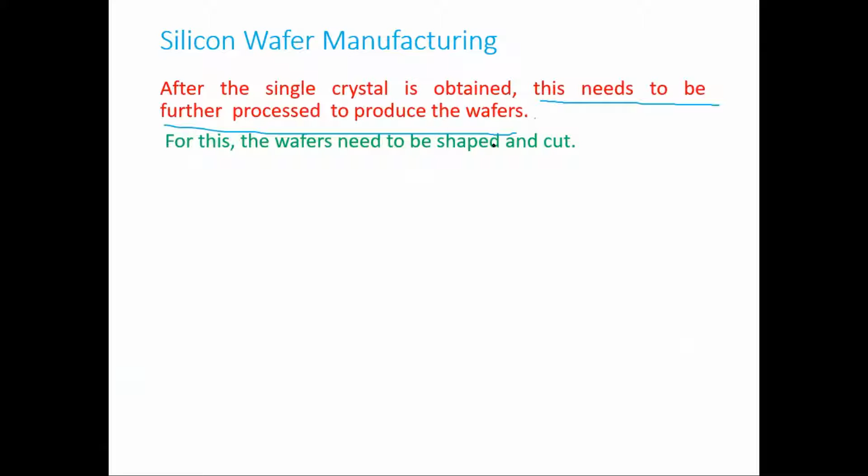We cannot do this with normal cutting materials; industrial grade diamond tipped saws are used for this process. Then the shaping operation consists of two steps.

The seed and the tang, at the end of the ingots, are removed. The seed is the one dipped in the molten silicon and pulled off. When you are pulling the ingot, you will find a tip there, a tang or beak, and that needs to be removed.

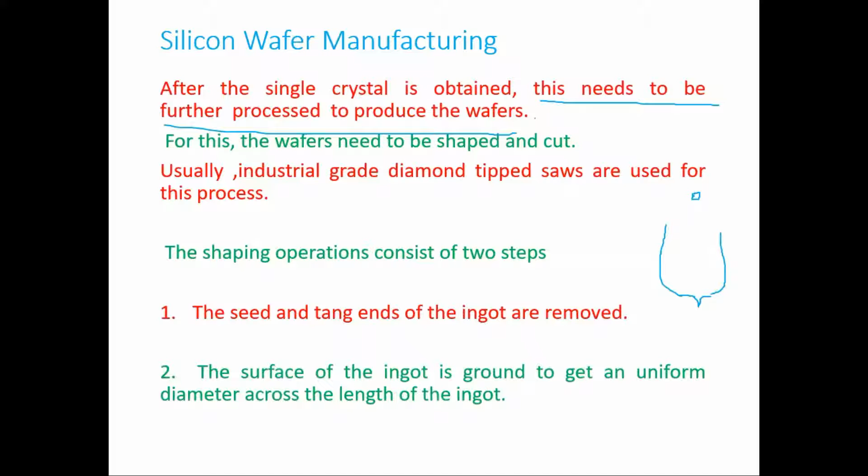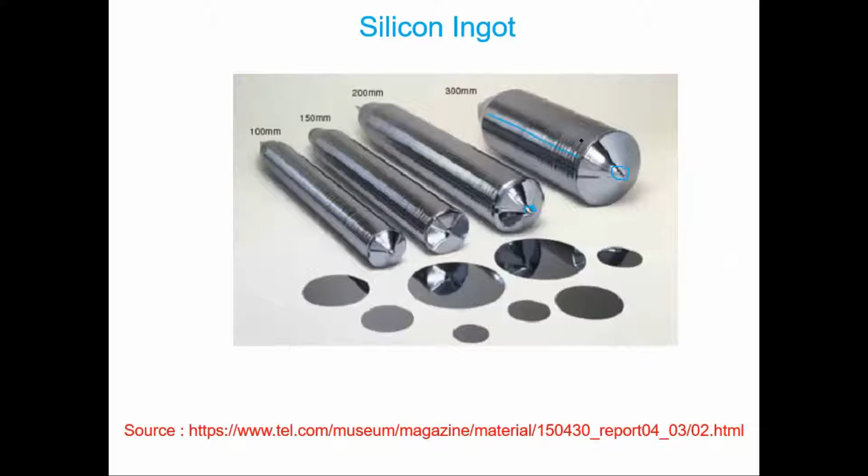The second thing is the surface of the ingot is ground to get a uniform diameter across the length of the ingot. While pulling, the surface is not smooth and there might be some diametric variations, so it needs to be ground to get a smooth surface.

Before further processing, the ingots are checked for resistivity and orientation. Resistivity means the actual conductivity, and orientation means the crystal geometry.

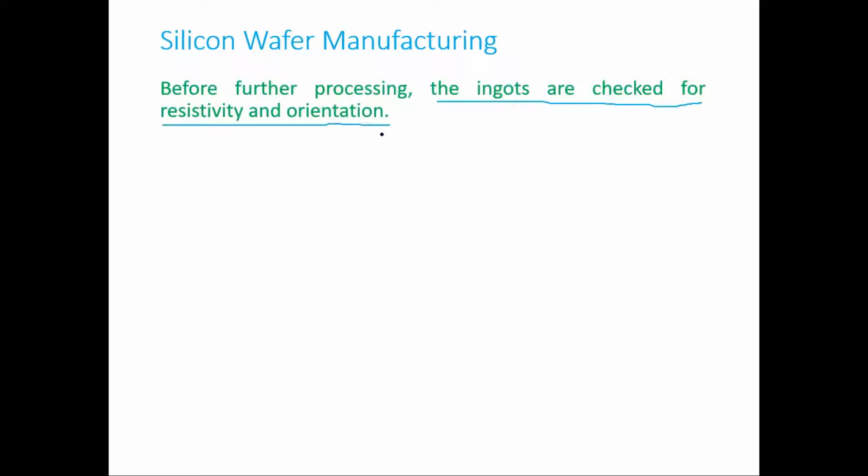The resistivity is checked by the 4-point probe technique, which can be used to confirm the dopant concentration — how much dopant is there in silicon, whether it's P type or N type, and what is its doping concentration, like 10^18, 10^20, or 10^16, whatever it may be.

This process is done along the length to ensure uniformity, so that one end doesn't have a different concentration than the other end. Uniformity is expected.

The orientation is measured by X-ray diffraction method after grinding. Orientation means 100 or 111 or 110, whatever it may be.

Once orientation and resistivity checks are done, one or more flats are ground along the length of the ingot. After this orientation and resistivity check, you will have flats developed on the ingot.

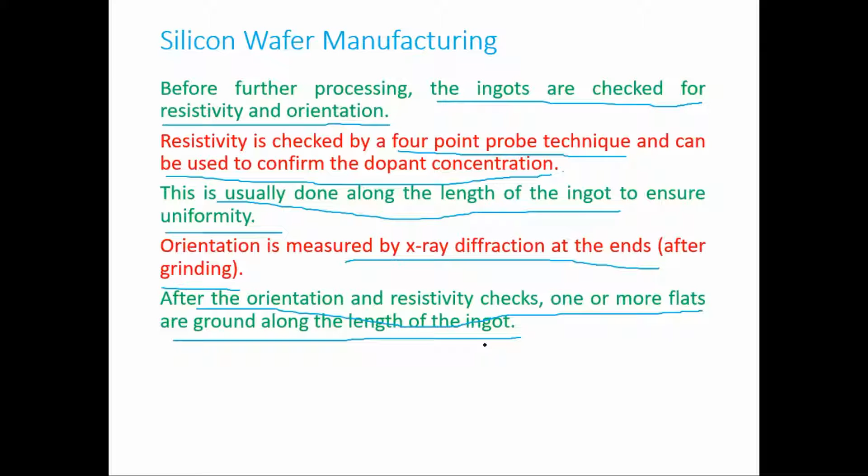And what is the advantage of these flats? We will discuss that in the coming slides.

Now the question arises why these two are preferred. The reason is that when you observe the several processes employed for the production of ICs, looking at these processes, orientations 111 and 100 favor most of the processes.

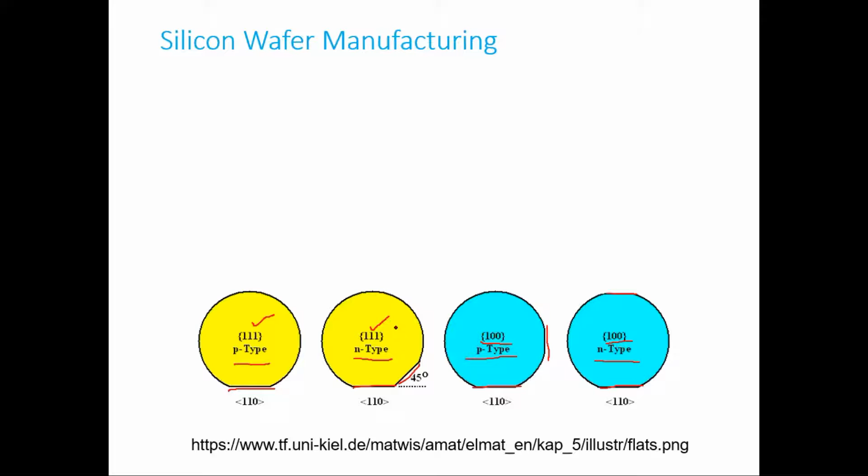Suppose you want to do the etching process, then these two orientations will favor etching more compared to the others. That's why they are utilized. So these are two types of flats: one is called the primary flat, ground relative to the specific crystal direction.

This flat acts as a visual reference to the orientation of the wafer. Just by looking at the wafer and the cut, you can tell what kind of orientation it is having and what is its type. This is the secondary flat.

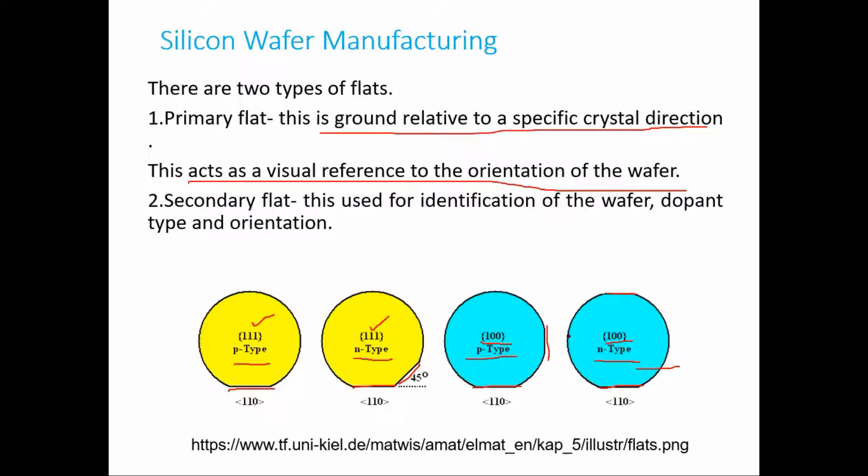This is being used for identification of the wafer dopant and type of orientation. So the primary flat is there. When this cut is present, you can say this is N type, this is P type, and in N type also, which orientation it is having, 111 or 100. So that's quite useful when we actually employ them in the manufacturing process.

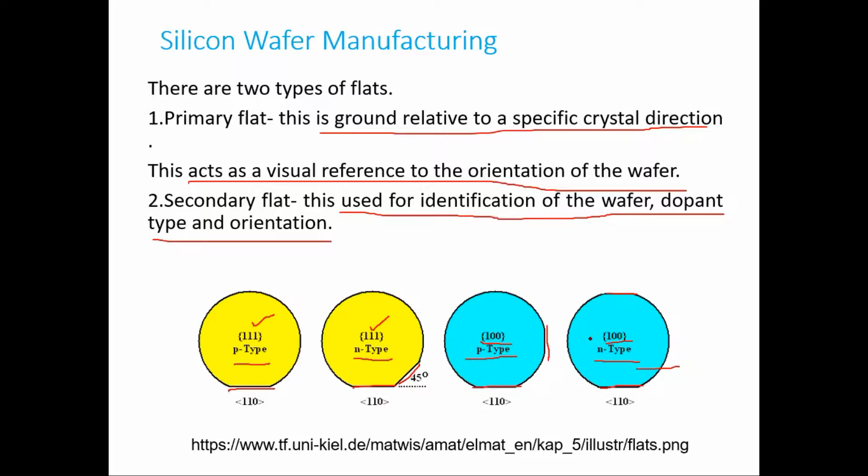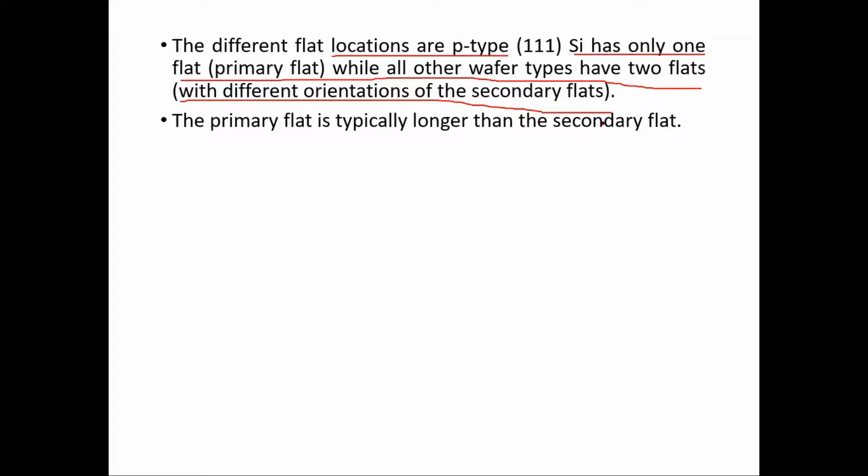The different flat locations are P type (111) silicon has only one flat, while other wafer types have two flats with different orientations of the secondary flats. The primary flat is typically longer than the secondary flat, and that's for your visual inspection.

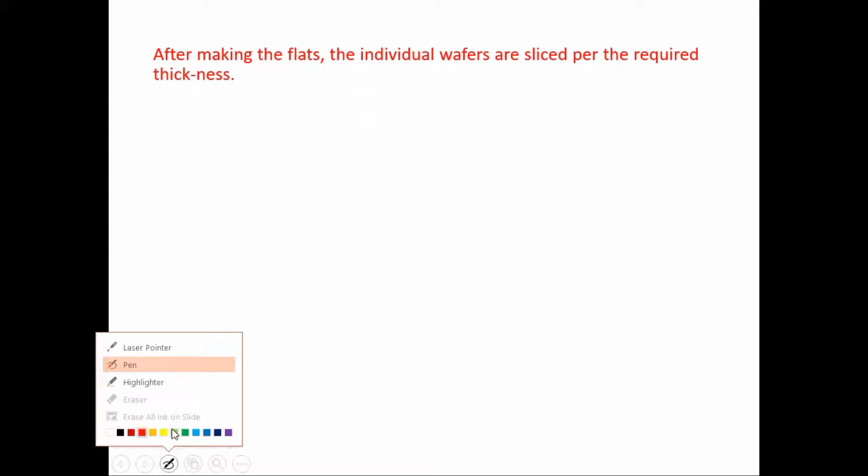Once your flats are made, what is the process? The individual wafers are sliced as per the required thickness. Inner diameter slicing is the most commonly used technique.

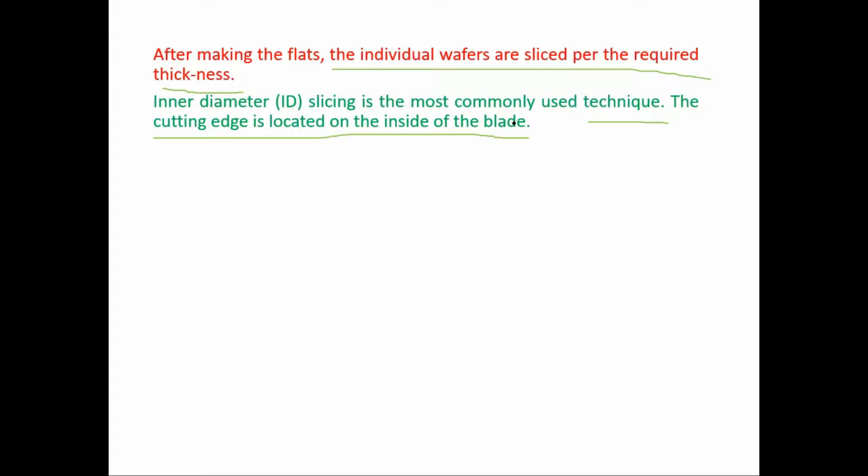The cutting edge is located on the inside of the blade, so it is cut on the inner side, not the outer side, to get into the specifications required by the fabrication lab.

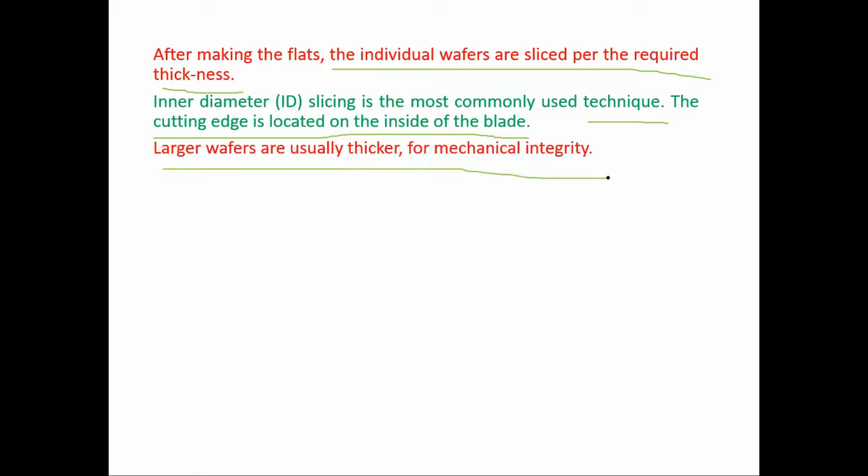Larger wafers are usually thicker because mechanical strength needs to be there; if they are thinner, they might break down. After cutting, what happens? A lot of powder material is generated.

The wafers are chemically etched to remove any damaged and contaminated region. They are chemically washed and etched so that if there is any damage or contamination, it can be eliminated.

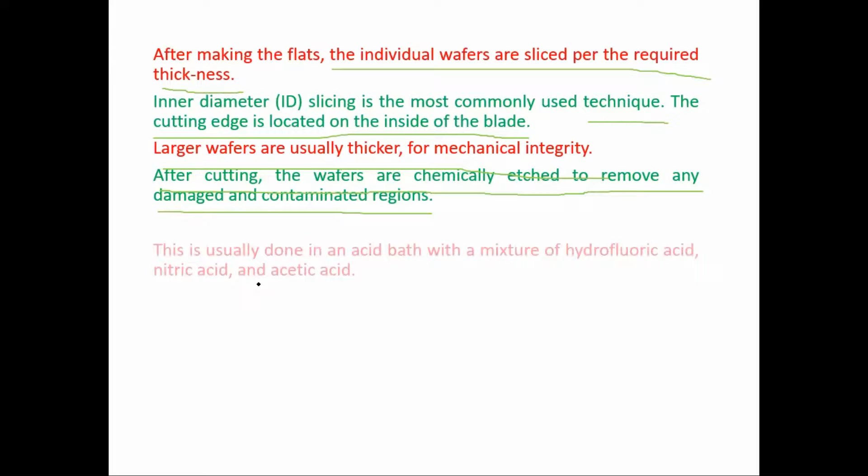This is not done with normal chemicals. It is done with an acid bath, and a mixture of hydrofluoric acid, nitric acid and acetic acid is used to get this chemical cleaning done.

After the etching, the surfaces are polished because the surface is rough. A rough abrasive polish followed by chemical mechanical polishing is done. This is quite similar to marbles being ground in your homes, and after that polishing is done, but that is for marble.

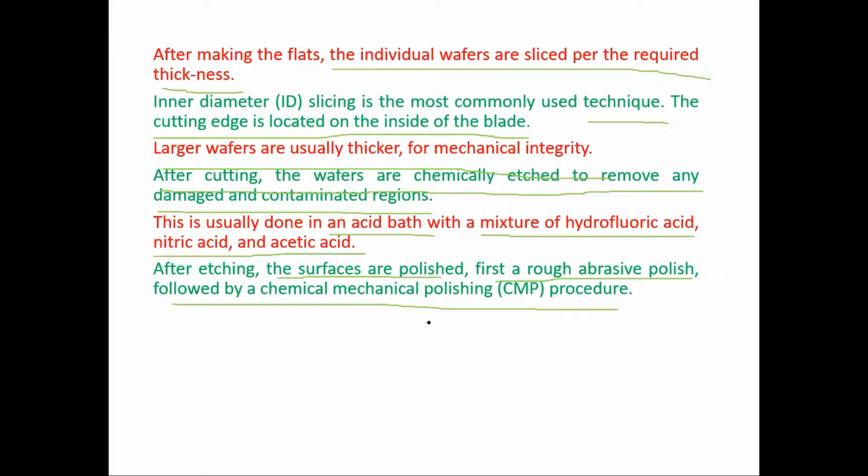A lot of dust is involved. Here we have different abrasives, but the procedure remains the same - they are polished to get the smoothness of that particular surface restored.

When you call it chemical mechanical polishing, it's a slurry of silicon oxide, SiO2, particles, and it is used with sodium hydroxide solution. This is used to get chemical mechanical polishing done.

The pad used for polishing is polyester material. Polishing happens both due to mechanical abrasion and also reaction of the silicon with the NaOH solution. Mechanically they are rotated on the wafers - that is one action. The other action is the reaction of silicon with sodium hydroxide solution.

Whatever loose powder-like material is there gets removed. Roughness is removed by mechanical abrasion, and anything lying on the surface is washed away with the sodium hydroxide solution.

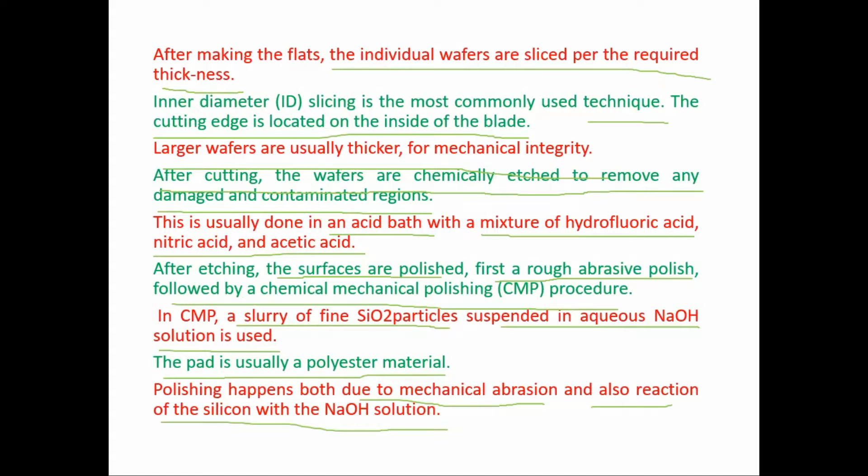Sometimes double-sided polished wafers are required. In those specific conditions, this is needed so that the opposite side of the wafer does not have many problems.

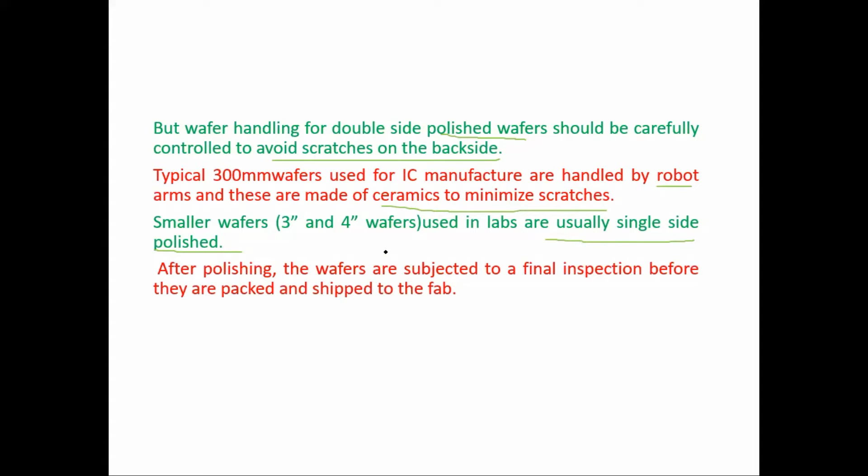After polishing, the wafers are subjected to final inspection before they are packed and shipped to the fab. So this is the process involved from the ingot being cut into slices, and then your wafer is prepared. The wafer is then used for other processes, which we will start discussing in the coming classes.

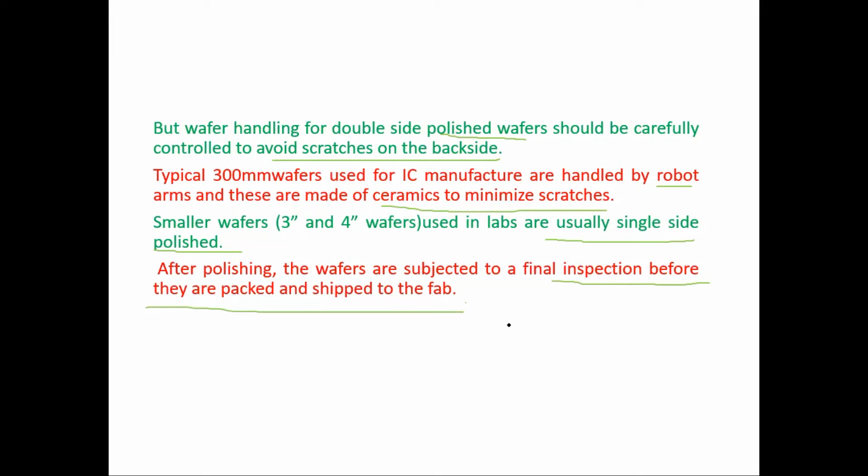The next process we will be discussing is oxidation. You have already seen about this in the video, and now this is all about this particular class. So thank you very much.